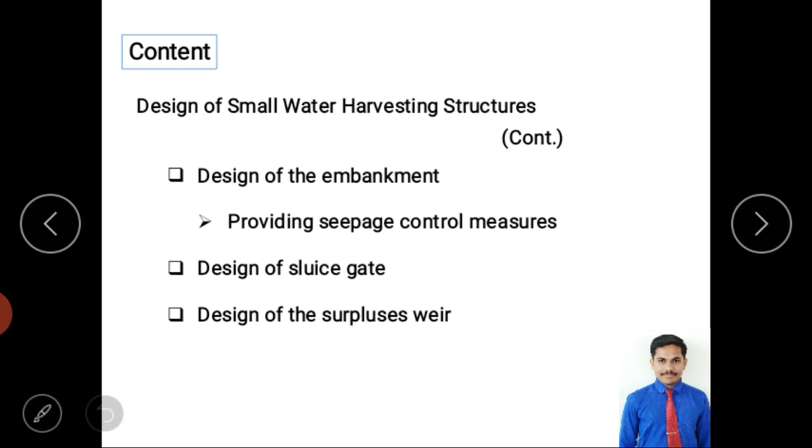First we will discuss design of embankment. In the design of embankment, when we take the construction, if we are constructing a bund like this, then water has to be stored here.

But if you take the cross section of the bund, it looks like this - the cross section of the bund is like a trapezoid.

So here we have the top width of the bund, bottom width of the bund, height of the bund, and side slopes of the bund, where bund slopes will be provided. These are the main parameters considered.

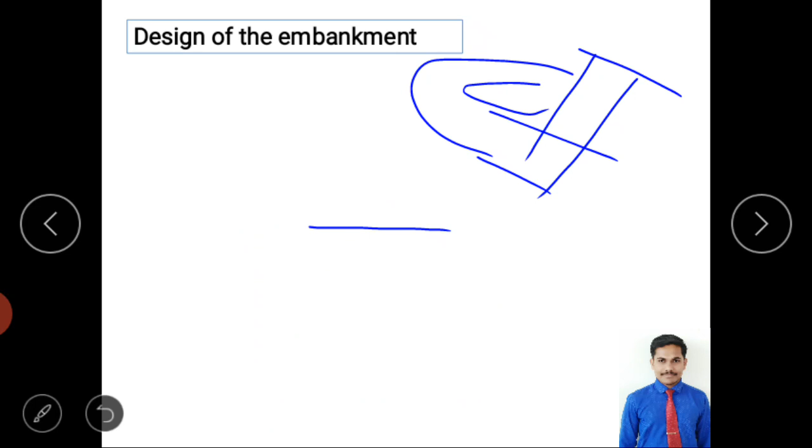So we'll see how we make the design based on some values. As I told, design of embankment means we have to decide the top width, bottom width, height, side slopes, and which type of material we have to use for construction. We'll discuss each topic one by one.

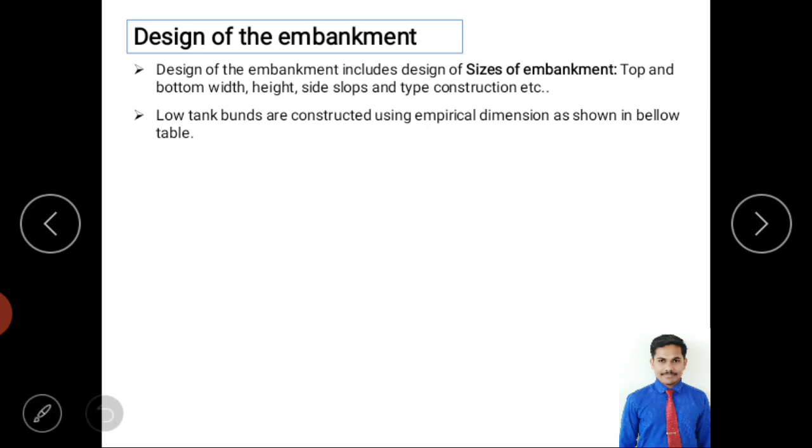As I told, these are for rainwater harvesting. Now we are mainly focusing on how to construct ponds and percolation tanks. Here we have to construct the bund, but we are not going into detailed design - we are taking some reference values from empirical values.

So here you can see the table. In this table three values are given: height of the bund, freeboard of the bund, and top width of the bund. We will focus on how much height is required.

If you require a height of 2.5 to 4.5 meters, then minimum freeboard you have to provide is 0.9 meter, and top width 1.2 meter. As the height of the bund increases beyond 7.5 meters, you have to provide a freeboard of 1.8 meter, and a minimum top width of 2.7 meter. So here we get an understanding with respect to height, freeboard, and top width.

You know what is meant by freeboard. Freeboard has to be provided after the full tank level up to maximum water level or top bund level - that is the difference between top bund level and full tank level.

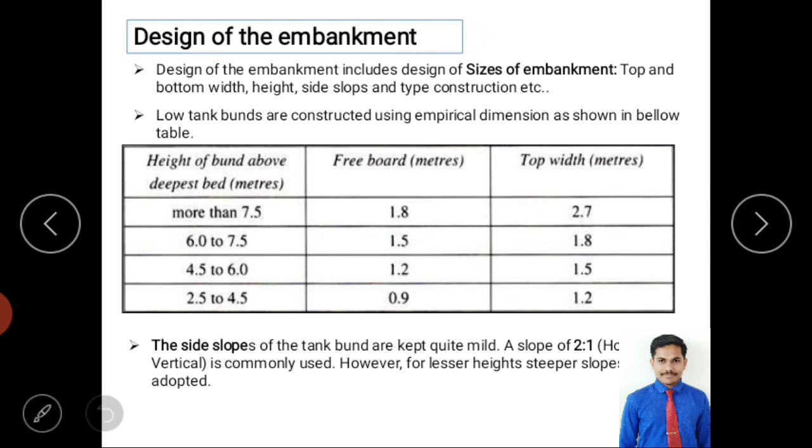Next, how we decide the slope. From empirical values, most bunds maintain a slope of 2:1 - 2 meter horizontal and 1 meter vertical - commonly used. If the dam height is less, it is suggested to maintain a comparatively steeper slope.

Then one more parameter - stone pitching or stone cover on the upstream side of the bund. The upper side of the bund is called upstream, and the lower side is called downstream. When storing water on the upstream side, due to wind, waves are created on the water, and this wave action may cause erosion.

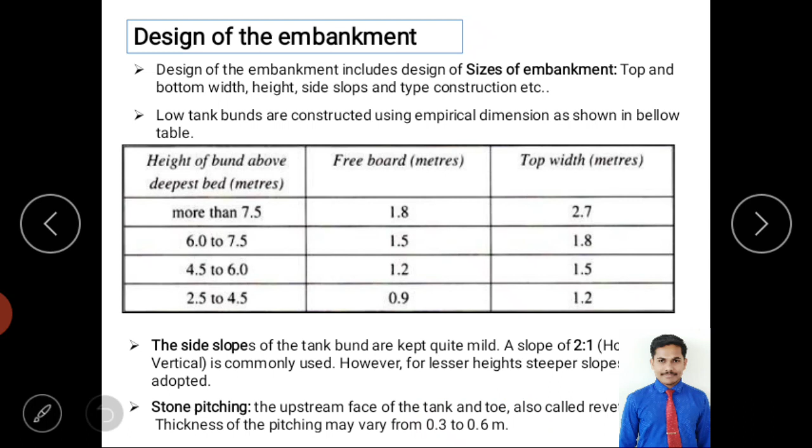To prevent the erosion, we have to provide stone pitching. It is suggested with a value of 0.3 to 0.6 meter width based on requirement. You will get more understanding with the help of an image - this shows only a small part of the bund, where we can see the top bund.

Here water is stored up to full tank level, and here one layer of gravel layer, and after the gravel layer stone pitching will be provided. So here you can see it is entirely for stone pitching, and the main purpose of providing the stone pitching is to prevent the erosion of the bund.

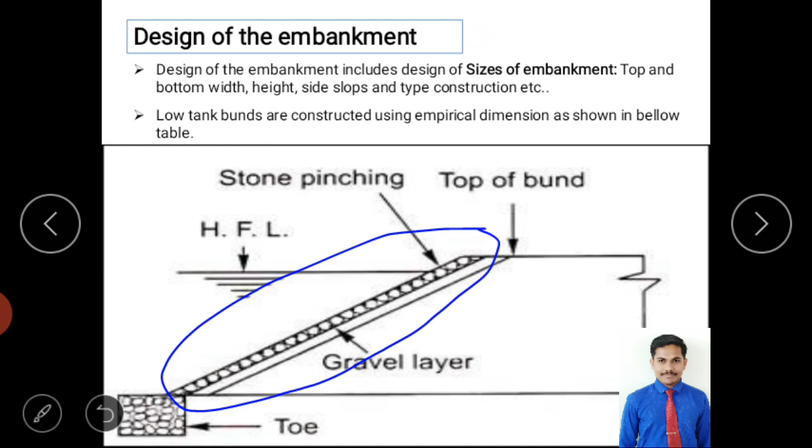So that's what we have to provide. So next we will see what are the next considerations of the design of embankment. So next is what kind of material we are using, and based on the material of construction of bund we are classifying mainly three types of bund.

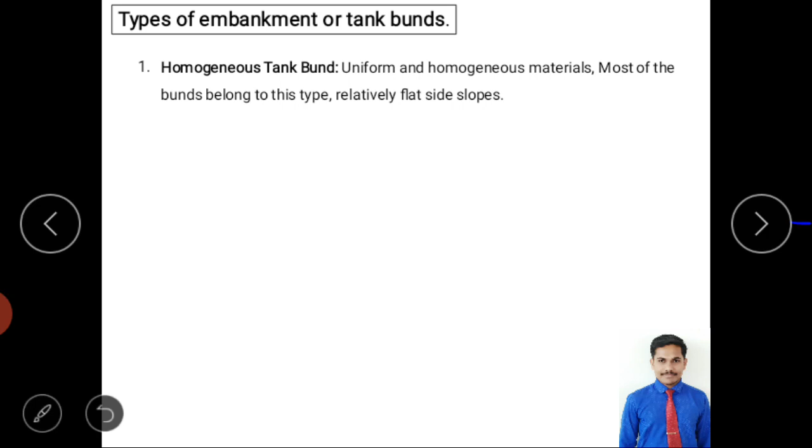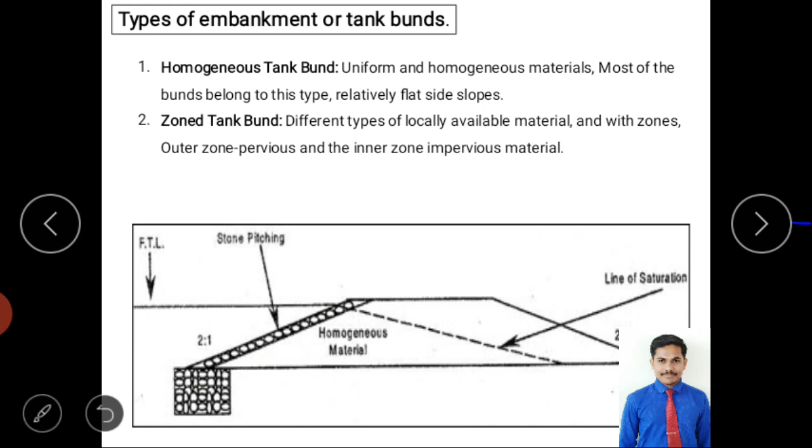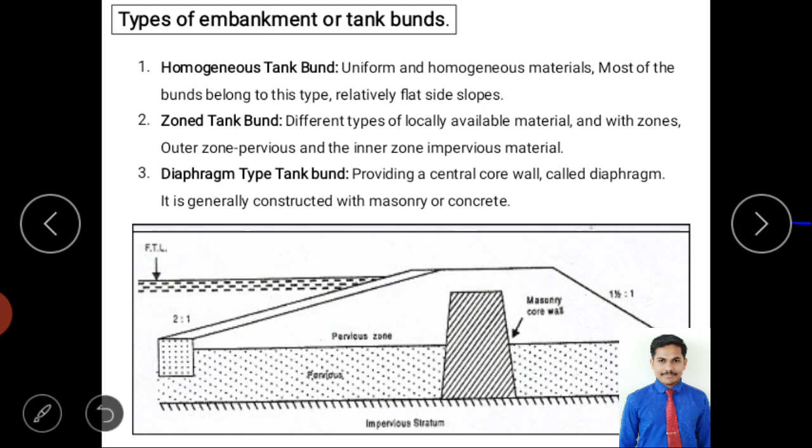So next we will see one more type based on construction and based on the material which is available locally. Next type is diaphragm type of bund. In the diaphragm type of bund, the difference is only in the middle we are constructing some wall, a masonry wall in the bund. You can see masonry core wall. The difference is what? It may be used as homogeneous or pervious, but in the middle, to tackle the seepage as well as to give strength and stability, there is a construction of wall, you can call it masonry wall. So that's called diaphragm type of tank bund. Here we are constructing masonry at the core of the bund.

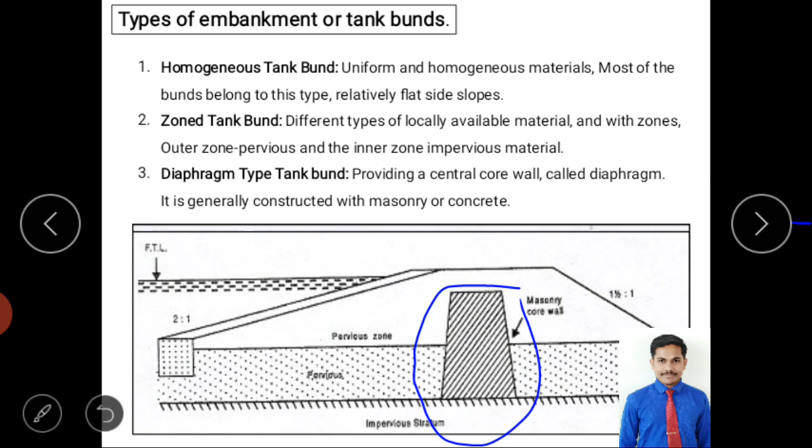Next, one more very important point. We know earthen bund means it has a problem of seepage. When seepage is there, it is very difficult to maintain the stability of the bund. To maintain stability, it has to tackle the seepage. Seepage is like passing of water from higher elevation to lower elevation, from one place to another, with help of piping. If pipings are created on the earthen bund, it causes instability of the bund, so we have to prevent the seepage. To prevent the seepage we have mainly two types of seepage control measures.

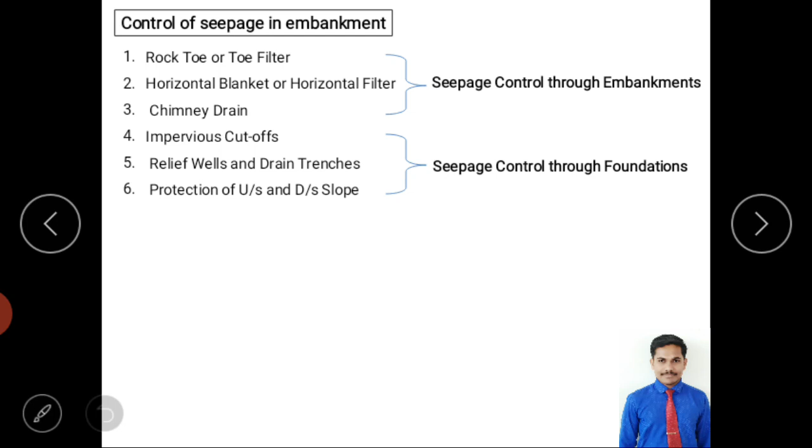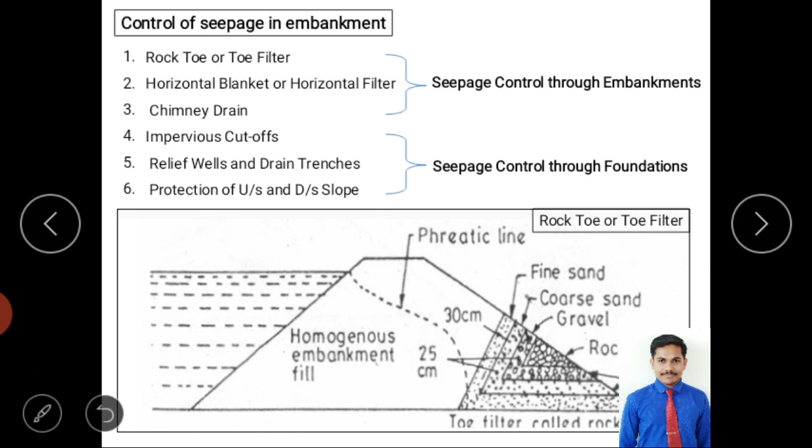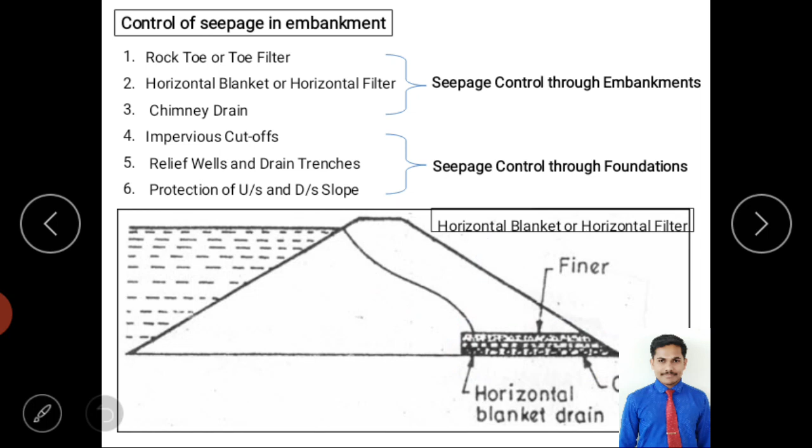So the next and last method of seepage control through the embankment is chimney drain. Chimney drain means what? We have seen chimneys in industries, where we send pollutant air to higher elevations. So we can call it chimneys, right?

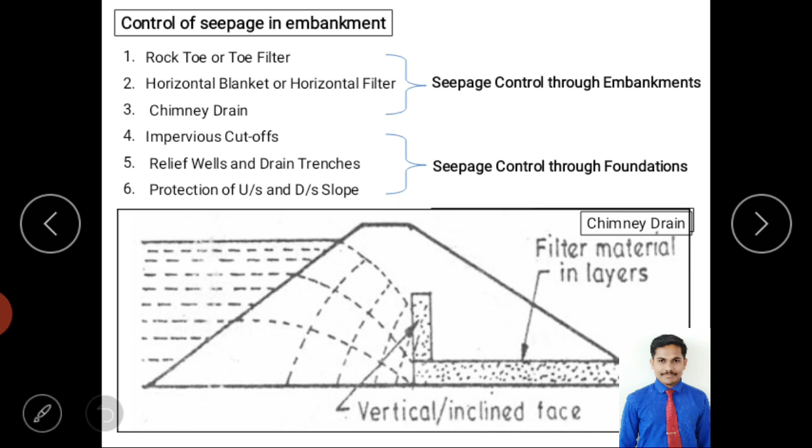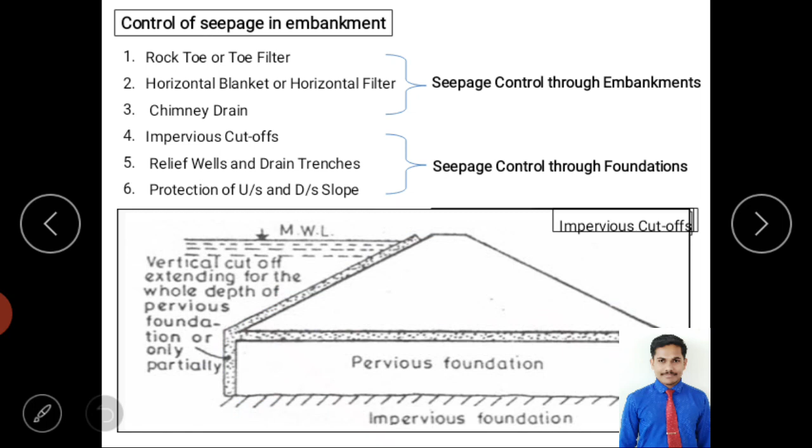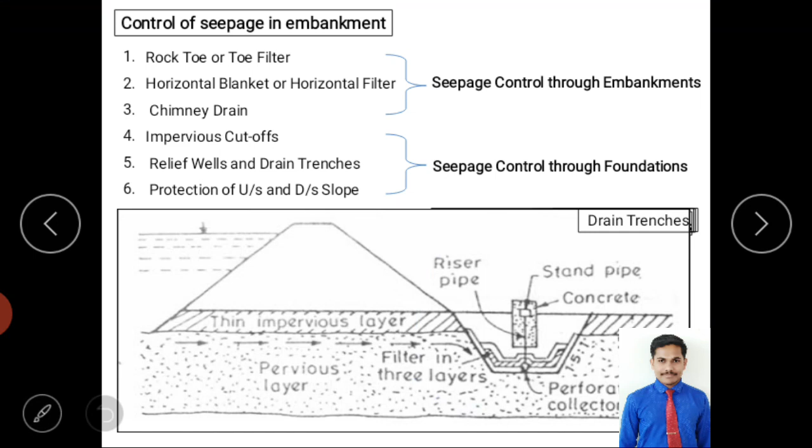From this you can maintain less saturated condition in the foundation, and you can get good stability, and even we are preventing seepages.

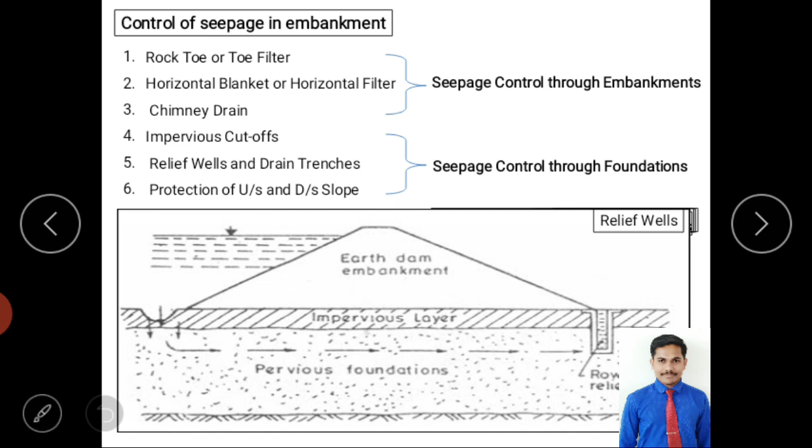So I think you understood the highlights of how to design and construct the bund. Now we are dealing with the next parameter after the embankment: design of sluice gate. You know sluice gate, right? It is a main parameter. If you are using the water, then how to use the water? It has to have some opening.

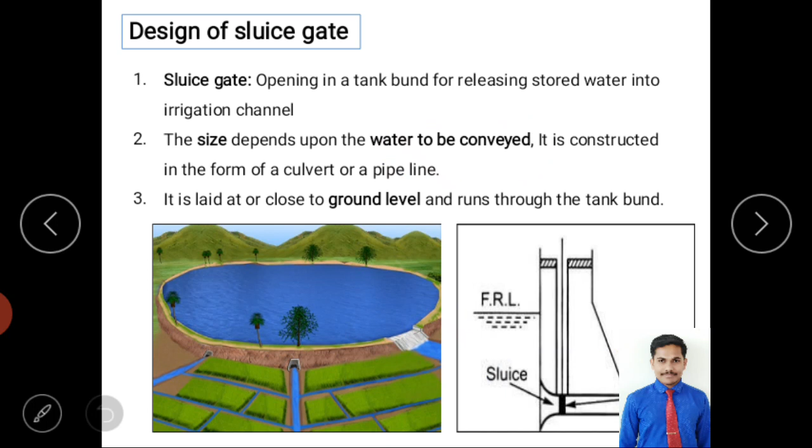Next, based on the structure, there is a classification of different types of sluice. Sluice for small sized tank uses the pipe outlet method. I will tell you what pipe outlet method means. This method is used for small sluice gates, not bigger ones - meaning lesser height of dam, a small earthen dam.

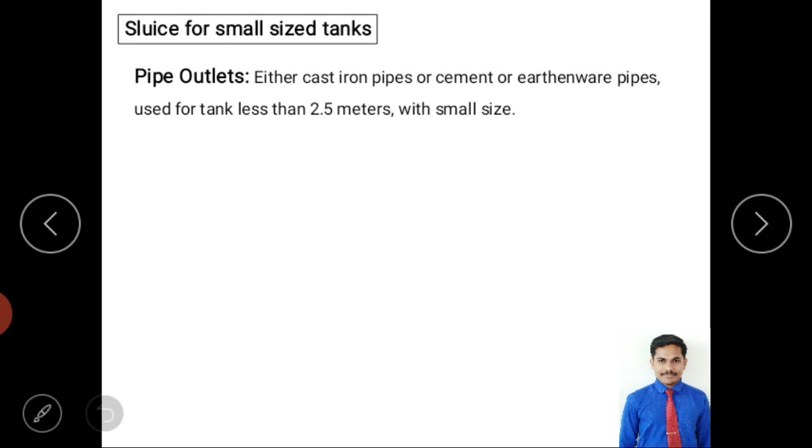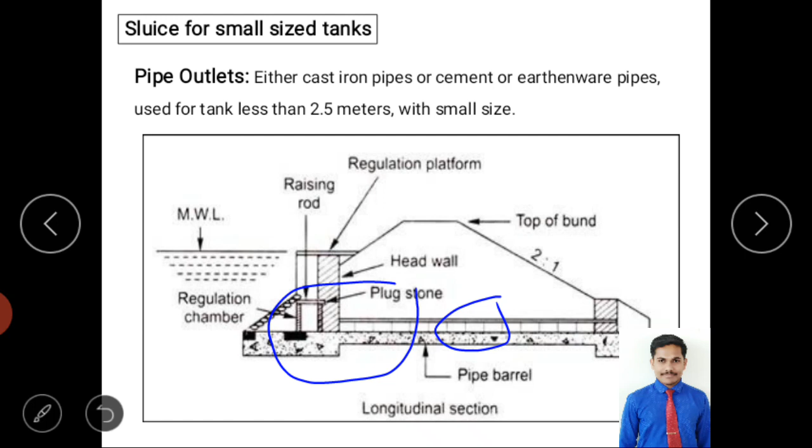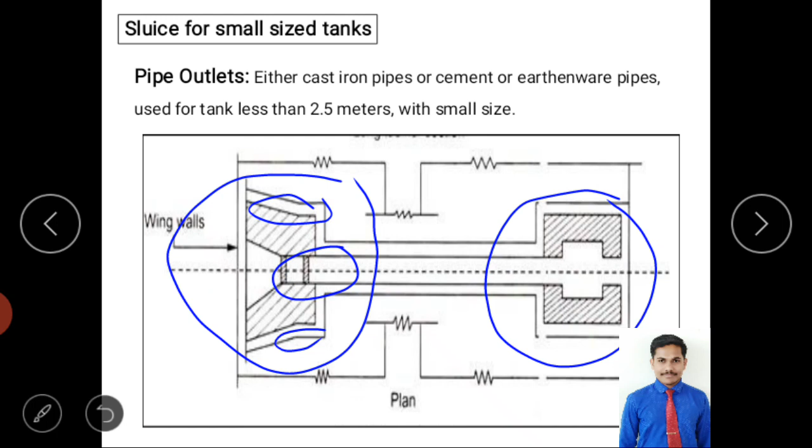You will get a good imagination if we take the longitudinal section. Here is the stored area, meaning upstream, and this is the downstream area. Wing walls are provided mainly to protect against erosion, and regulation of flow is maintained. A wall will be present, and when you open it, water flows from this lower location to irrigation purpose or some canal. This is the arrangement of the sluice gate, provided within the bund, at the ground level or above the dead storage, mainly to use or release the water to the canal.

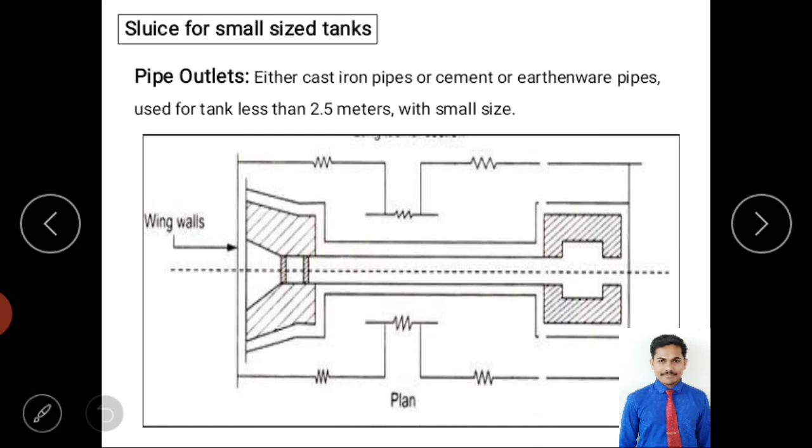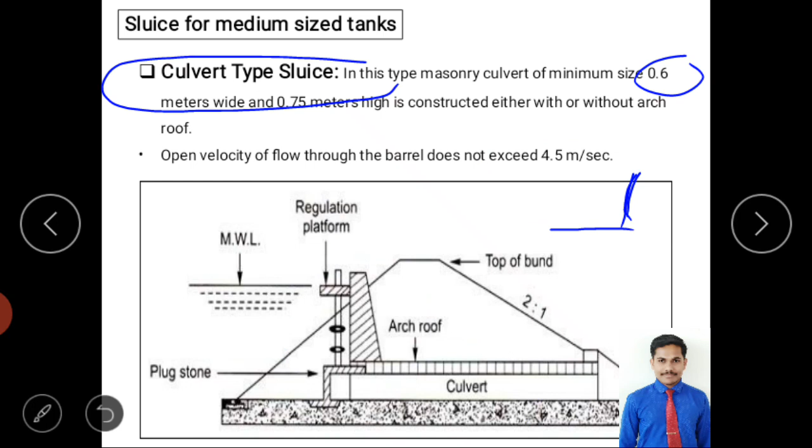Next type is also for medium size of the tank. So first one was small size of tank, then we studied medium size of the tank, and it is culvert type of sluice.

The selection of different types mainly depends on the budget and requirement. Many factors determine why they are selecting a particular type of sluice based on the requirement.

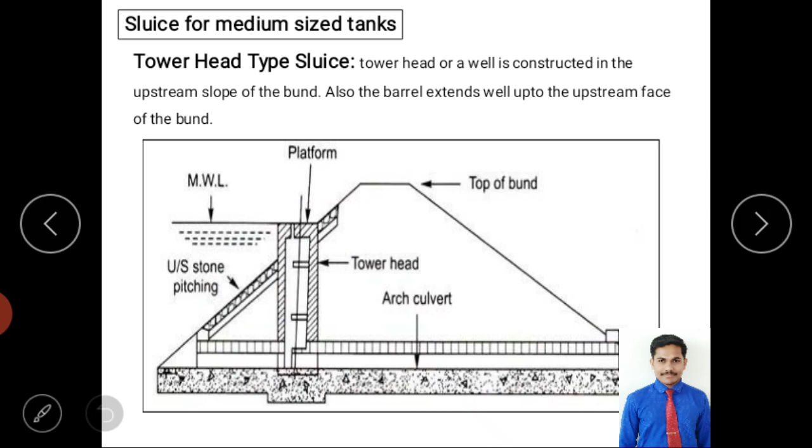Next we will go for design of surplus weir. Now we studied embankment design, then we studied about sluice gate. So now we are going for the last portion: design of surplus weir. This is a very important part of the bund, and if you neglect this part, it may cause collapsing of the entire bund.

Because we don't know what kind of rain will take place. If high rainfall occurs, more flow towards the tank happens, but if we are not removing the excess amount of water from the dam, it definitely creates a problem for the bund. So construction of the weir is a main part. We'll study where we are constructing the weir, and what is meant by weir.

When the water stored level is increasing from the full tank level, we have to remove the water. From where? From the escaping weir or tank surplus weir - it is called both escape weir and tank surplus weir. One more point is that water may be stored above the full tank level also, for example if it's the last rain and we may not get water after this. Thinking in that mind, we use some stone, like stone gates.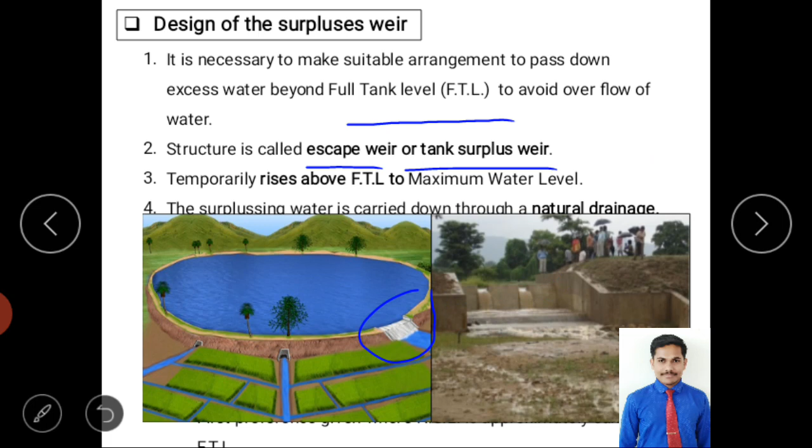So now we'll go for site selection for sluice. We studied site selection for the entire structure, but now we'll mainly focus on site selection for the weir. First point we'll see.

It is preferable to locate the weir in a natural saddle. Instead of constructing an earthen bund where you are getting the barrier naturally - for example, here you constructed the bund, but in some portion naturally a bund or natural barrier is there.

So here it is preferred to give the surplus weir. Why? Because of the escaping of water - erosion will be more there, erosion force will be there, and wear and tear will be there.

So to give stability to the structure, you have to provide a naturally strong place near the bund or periphery of the bund. So, next point.

Existence of a well-defined escape channel. As I told, when you are removing the water, it has to flow through a well-developed channel. If a channel already exists - a river or stream - you have to supply the water towards that only, to the natural drainage.

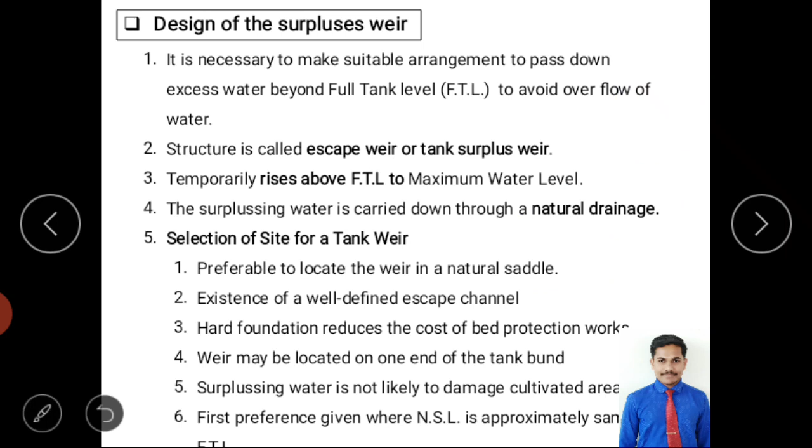So site selection is a very important part of the bund. Next we'll study different types of weirs, based on material, investment, and requirement, we go for different types of weirs.

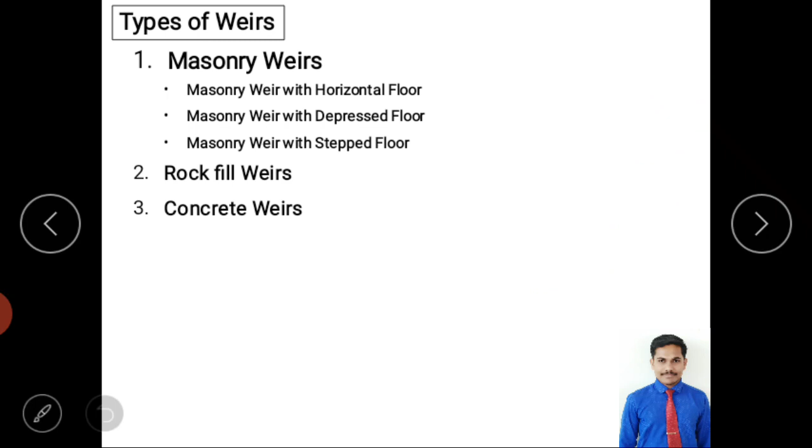Mainly three types of weirs: masonry weirs, rock fill weirs, and concrete weirs, named after the material and technique used to construct them. We're not going into detailed design study, just the parameters we consider for a good design.

Why do they use dam stone? Because they want to improve the full tank level to the maximum water level. In some places they improve the full tank level to the maximum water level with the help of stones, as temporary storage based on conditions.

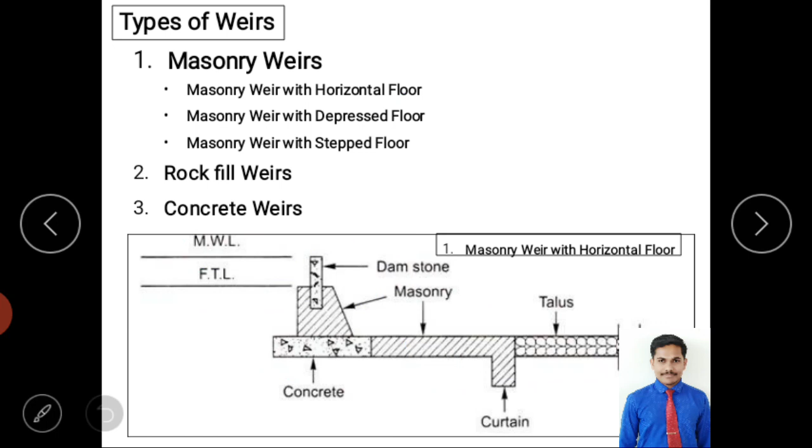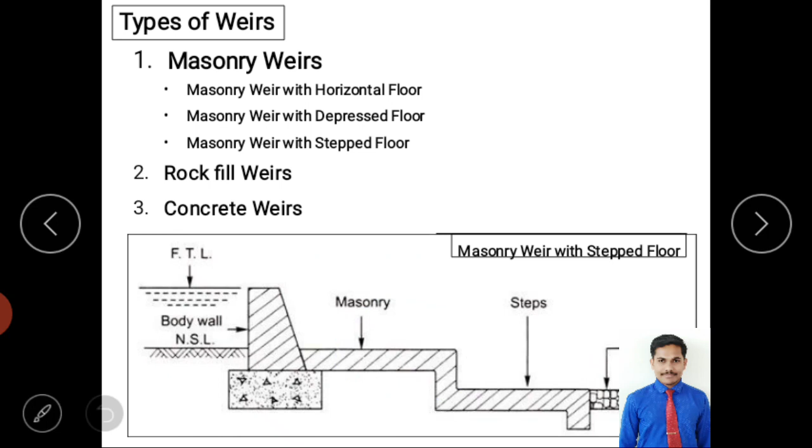Next type, we can see by the name masonry weir with stepped floor. Here also we use masonry, but the floor is stepped. That's what is called masonry weir with stepped floor.

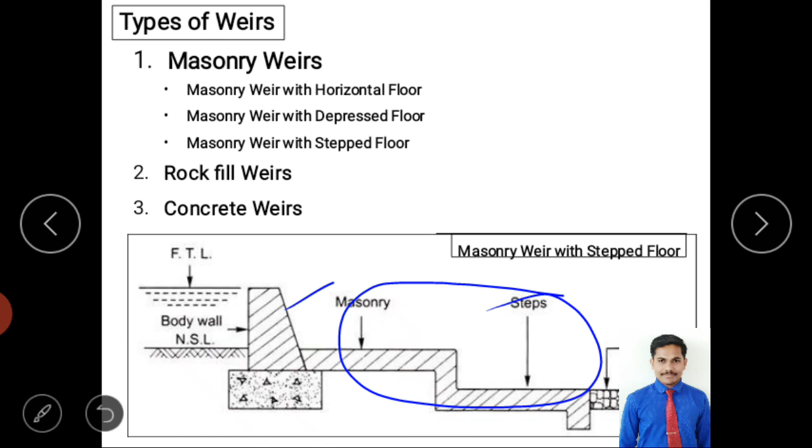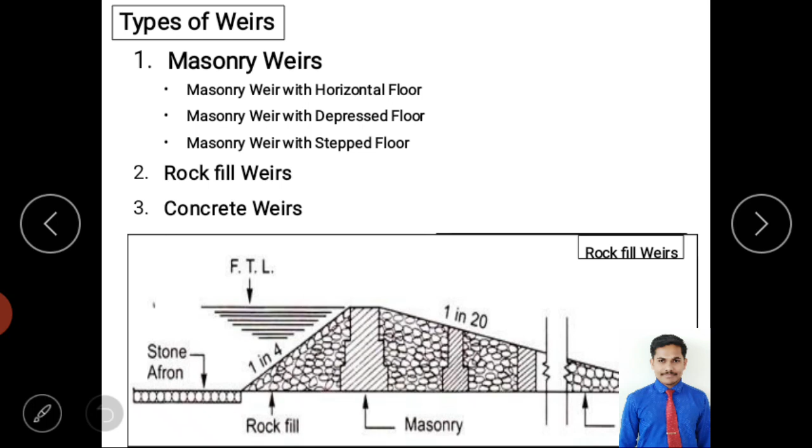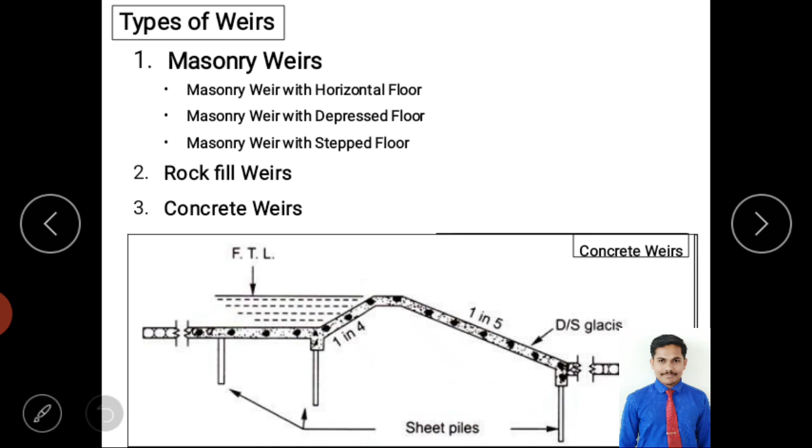So we understood what is meant by weir, the selection for the weir, and types of weir. I think you understood some highlights about how to make the design of small earthen water harvesting structures.